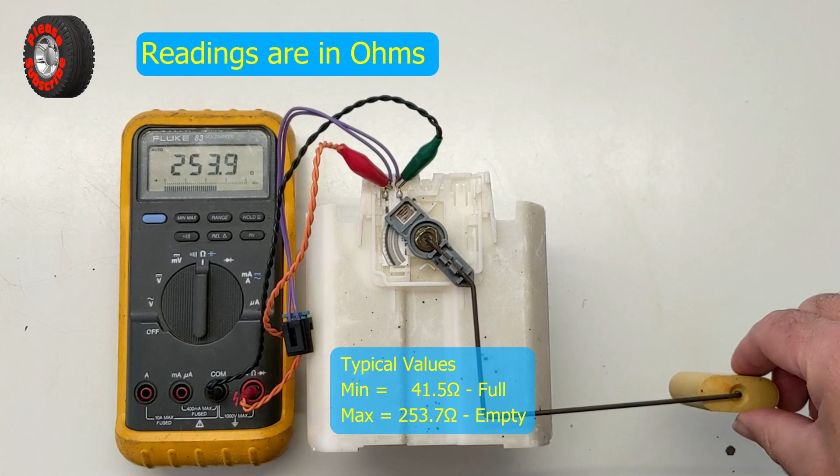Here is the real life operation of the float arm. This is an old float arm, so there are some dead spots. It's sat out in the atmosphere for a long time and it's got a bit corroded, but you can generally see the complete operation here from min to max. Interesting to note that at the low spot here,

there's actually a gap of about 5 or 6 millimeters between the base of the internal compartment and the float. So this sits directly on the fuel tank base inside under spring pressure, and then as the fuel level rises, your float level rises, and that comes to the absolute maximum.

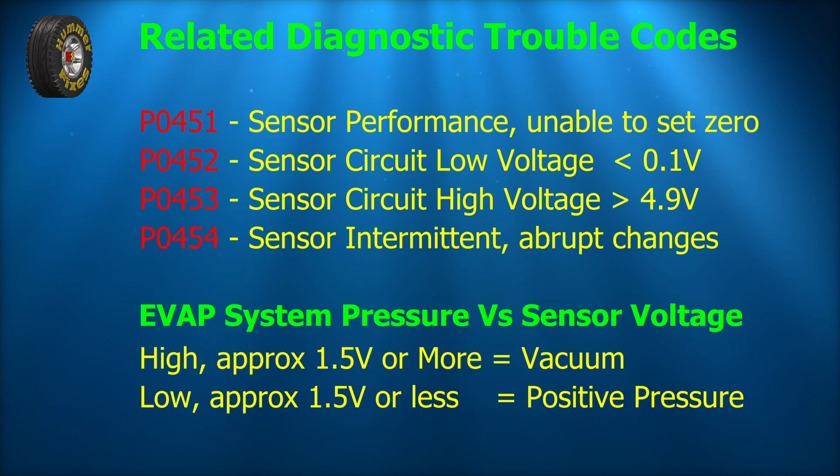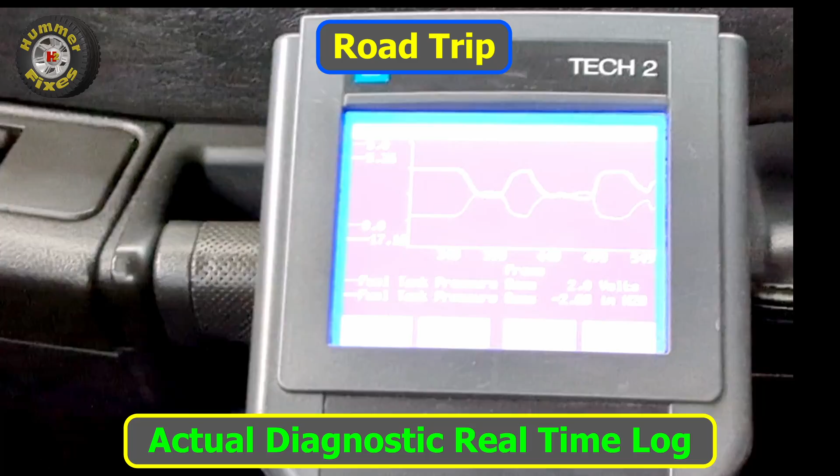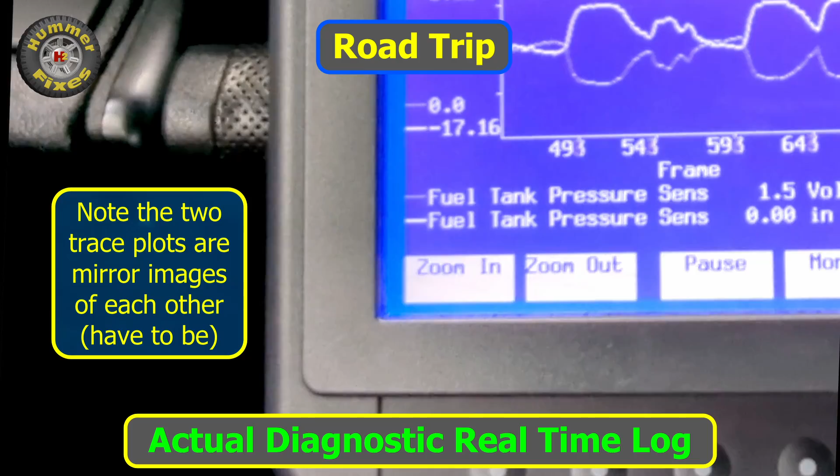Anyway, that's the result of the journey. The small dotted line, the thinner line, is the actual pressure sensor value, which is obviously changing, and the thicker line is the actual inches of water. So that should give us something to work with.

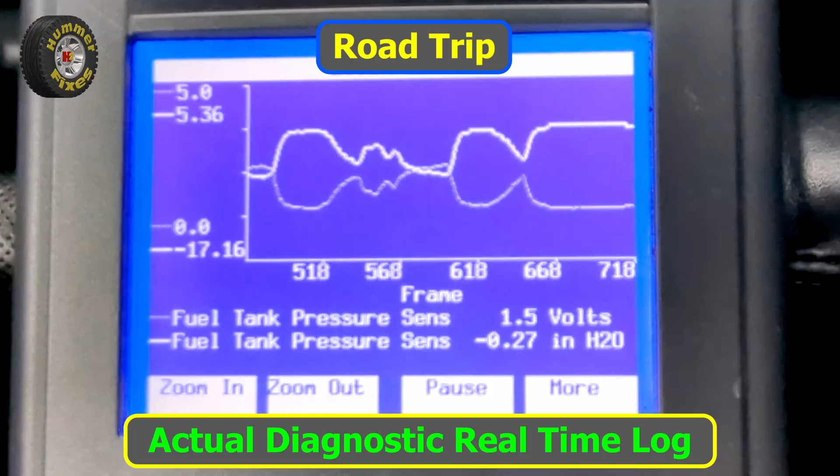Here is the vacuum sensor, or fuel tank pressure sensor, or vapor sensor, goes by several names. This particular sensor is used in a lot of vehicles. It's used in Hummers 2003 to 2007. I think 2008, 2009 may use a different sensor.

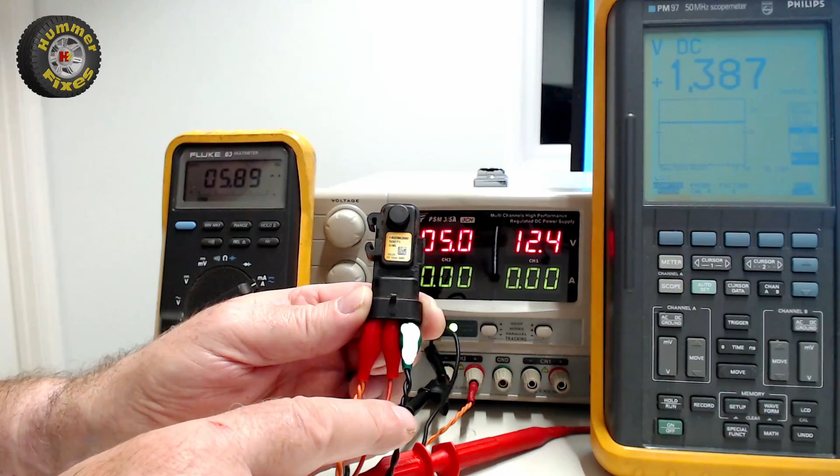To show how it operates, I've hooked it up to a power supply which is set for 5 volts, which is this value here. The scope on the right there is measuring the signal voltage. The meter on the left here is measuring the current going through the device. So on the left hand side, on the orange wire, we've got 5 volts. The middle wire, red wire, is the signal, and the black wire on the end there is 0 volts or ground or chassis. There's a port on the back there which connects via a rubber grommet, which I think when

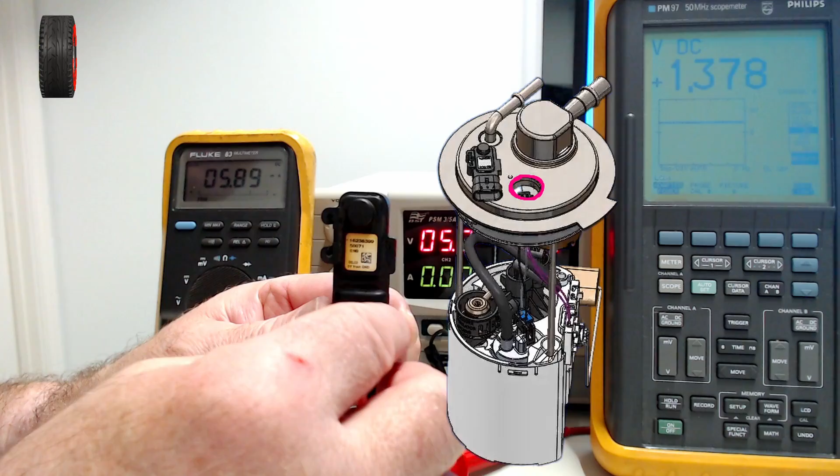you buy them they come as a pair. You get a grommet and this at the same time, and that just pushes in either into the tank or into the fuel pump. The reading on the right at the moment is measuring the ambient tank pressure. You will see that as the pressure goes down, then the voltage will go up, and when the pressure goes up, the voltage will go down. So it's kind of upside down really, it's the inverse.

To show it operating, which is very difficult to actually do in vehicle, I've got a miniature Hummer H2 fuel tank to simulate what goes on. So we just stick that pipe on the sensor, which is hard to do without actually changing anything. If I squeeze the tank, which is creating positive pressure, you'll see that the voltage goes down. I'm hardly pressing that at all.

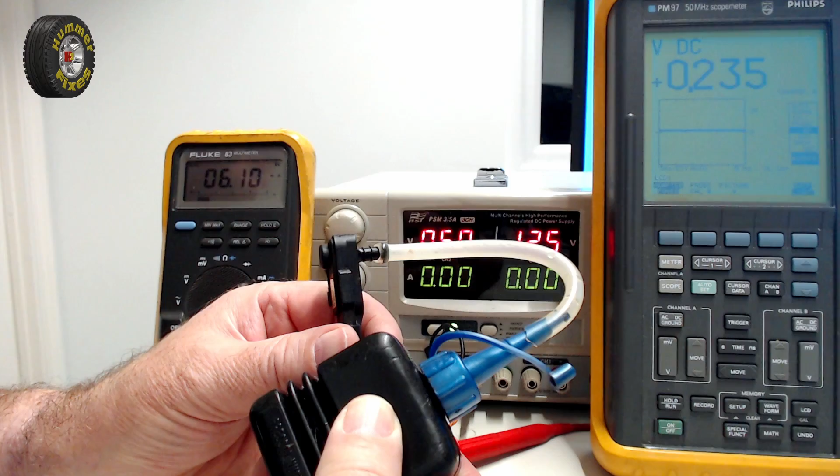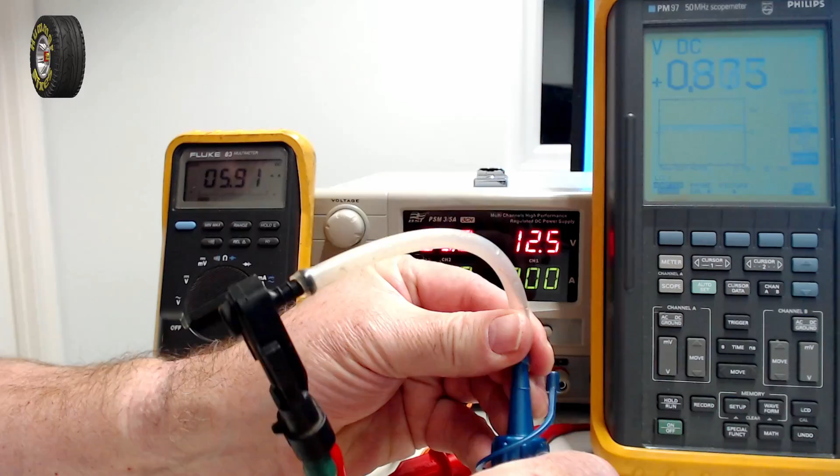These are very small readings, and I'm going to try and convert these on screen for you in pounds per square inch, which I think is what most people are used to dealing with, instead of inches of water. If I let it go again, it returns to whatever pressure was left in the system. If I unplug the tank, which is easiest done on this end, and then squeeze it to create a vacuum and let go, you can see that the voltage now goes pretty much up to maximum.

Above 4.9 is considered a fault and will be reported as a DTC code, and similarly below 0.1 is also considered a fault and you'll get a DTC. So that sets the opposite operating range. 1.5 volts is normal atmospheric pressure, I believe. This will be below 15 pounds per psi. That's what atmospheric will be.

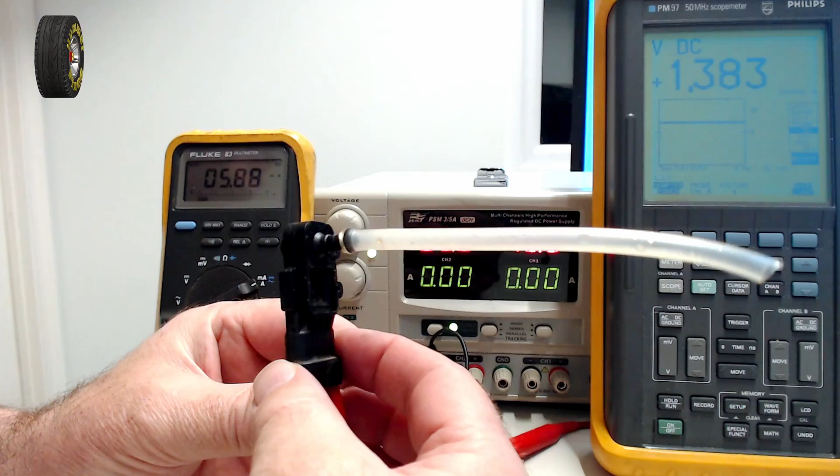So you can see the pressure is quite high here today, and we are, as you go up in altitude, the pressure will go down. So all of these things are affected by altitude and pressure. So that's how that sensor operates. Quite simple and very sensitive, I have to say.

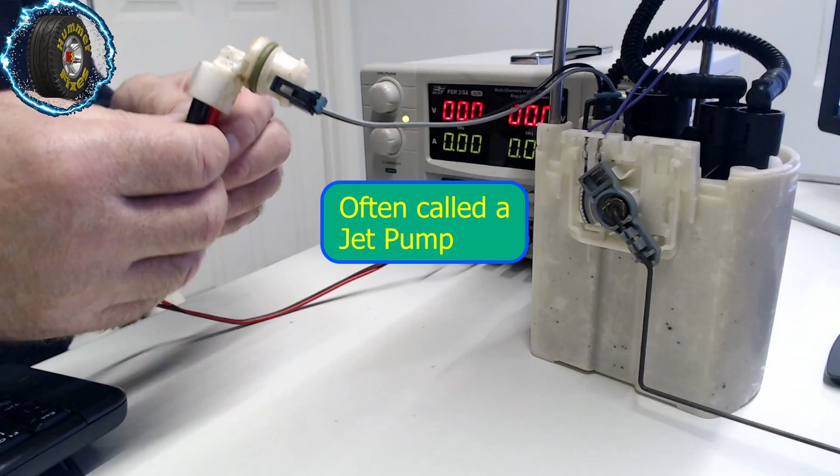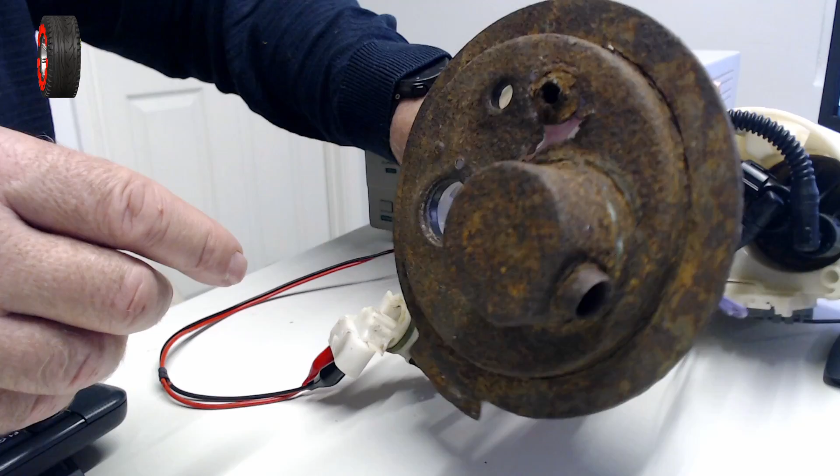Here I've hooked up the fuel pump motor to a bench power supply. These connectors just plug in. This connector was the one that actually sat in the top there, which I've removed. You can just see the hole that it mounted in here. That was the hole there. So I've taken that out. That is pushed in. It's pretty hard to pull out, particularly if your fuel pump is rusty like this one. I've connected it up. I've set the power supply to 12 volts.

I'm just going to turn it on and see what current it takes. I must point out there is no fluid in the reservoir on this, so this pump may not be straining too much. I have no idea what the actual current will go up to when it's pumping real fluid, it could well be double. As it stands with no fluid in the reservoir, we're taking about 1.2 amps.

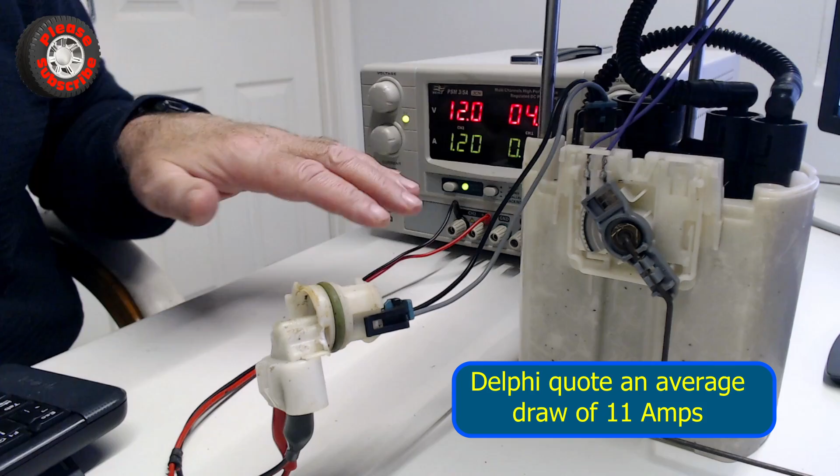This pump sounds a little bit ropey to me. Probably because it's been stood in the atmosphere for quite some time, well over 2 years, and it's probably dried out and the bearings are dry. Bearing in mind this pump actually operates submerged in fuel, so all these electrical connections and everything, including the float sensor, are all submerged in fuel.

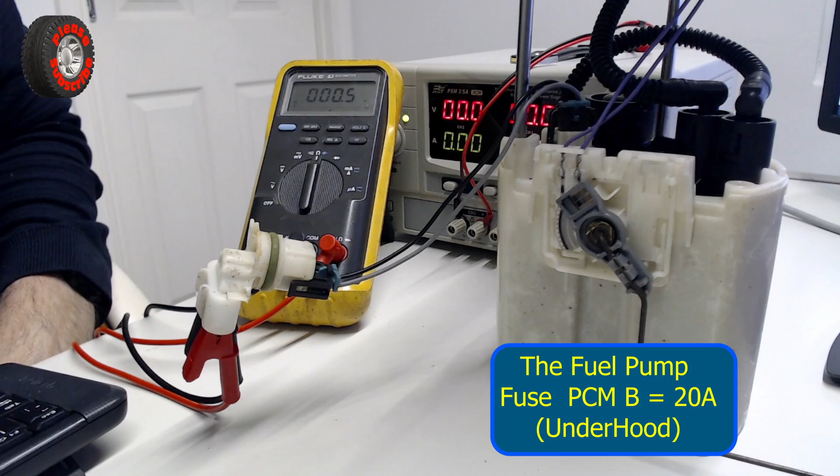One final thing on the fuel pump motor. I've got a multimeter here set on ohms. The probes have been zeroed out, so it should read 0 ohms, and we can now measure the resistance of the fuel pump. Bearing in mind this is not a proper test because once it starts up the dynamics change, but with no energy connected to the motor we're registering half an ohm, so it's very low impedance. You'd infer from that that at 12 volts that'd be like 24 amps, which would be a lot, but I don't think it's going to be that much. This is for reference, so if you wanted to measure your fuel pump to check for correct wiring or no breaks in the wiring, you should be seeing quite a low resistance like this without any power connected. That's with the leads going into the terminal on the top of the pump.

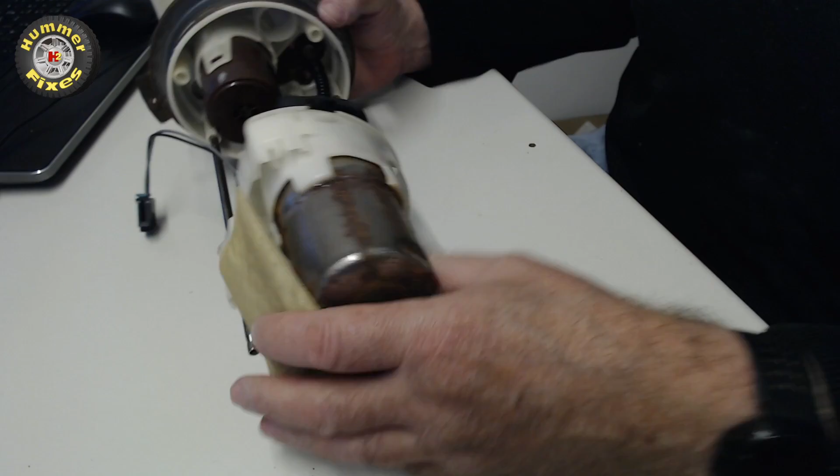Whilst I have the pump apart, you can see here is the sock filter, which looks a little bit like my CAD model, and you can see that clips in over the motor and locks it into place.

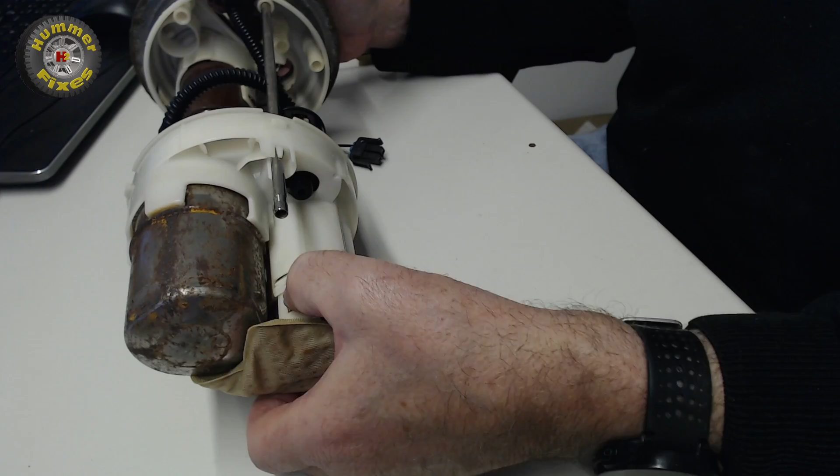I'm going to see if I can just unclip this. Might be able to do it, I don't know. This pipe's attached to the top, but we'll see if we can get it to come out.

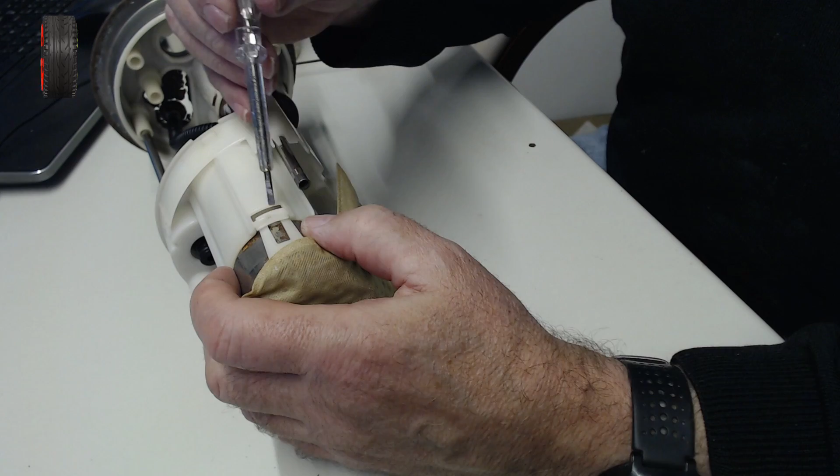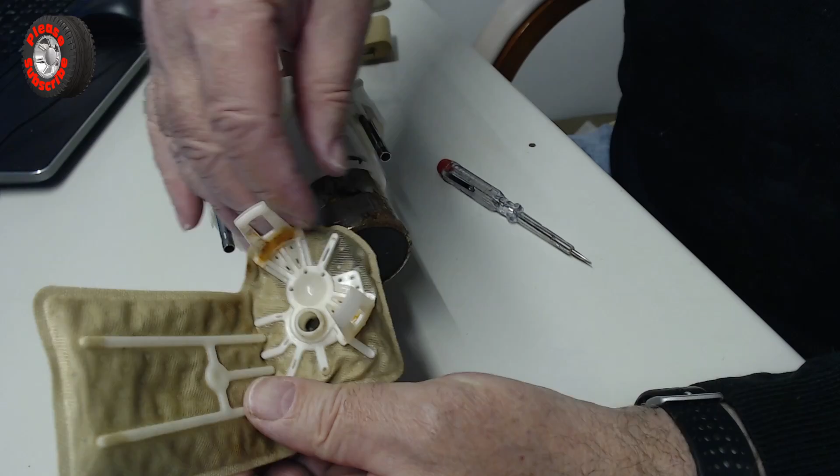That's one half, and there's the other half, so that's the sock filter. You can see, as I mentioned before, this is probably well rusty because it's been stood out in the atmosphere, and normally this is submerged or well soaked in fuel. What the state is internally on this, I'm not sure, maybe one day I'll cut it open and have a look.

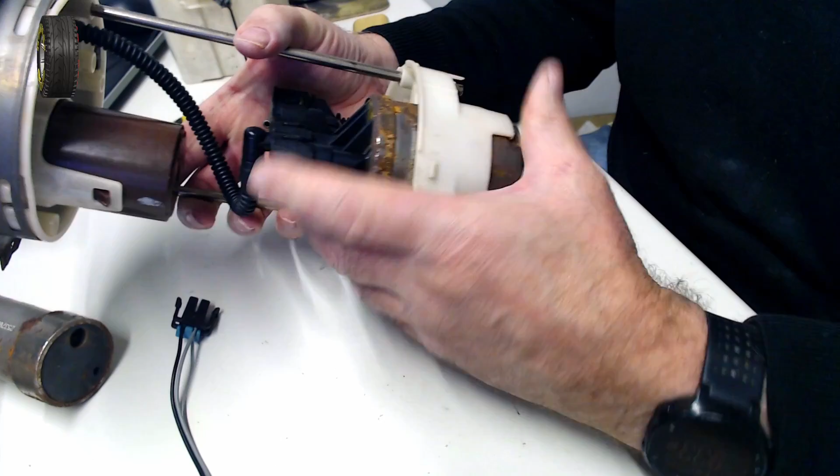Alright, I've managed to get the filter past these 4 clips. It took several screwdrivers and some thin steel rules to actually get it past, but it just came out. Again, this is not a service replaceable item, and you can see it's probably not cost effective.

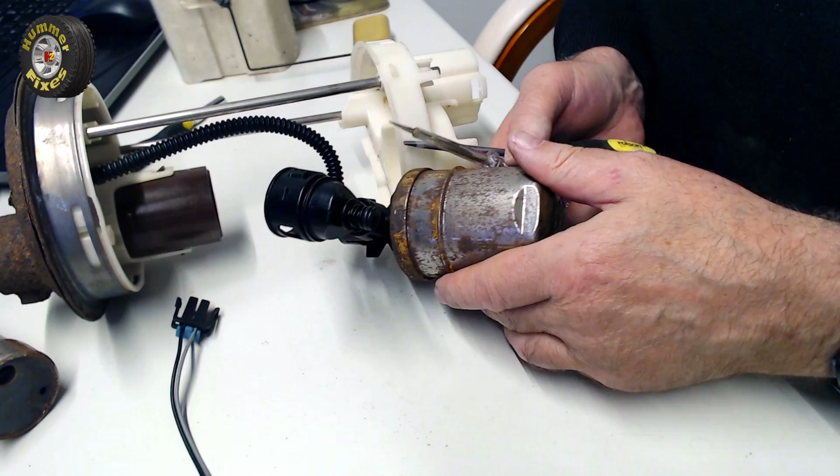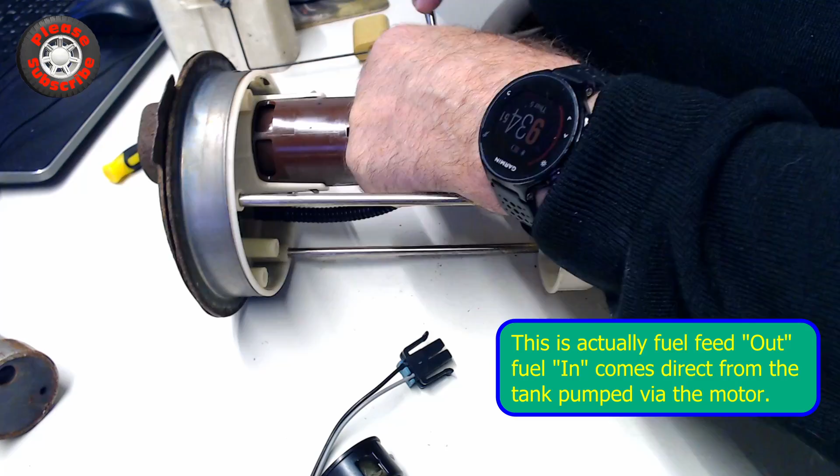On the end of the fuel filter is the pressure regulator, which I can release, so that's the pressure regulator assembly. That itself is a clip-in item, I'll talk about that in a minute. There's the fuel feed out, which is this line here, it's tricky. So there we have the fuel feed, which is bonded to the pipe that's in the top there.

And there is the fuel filter, which looks exactly like the CAD model, and you can see internally in here are the O-rings for the seals. There's one in every port, so there are 3 altogether, 3 O-rings which seal. Again, there's something loose inside there, it could be interesting, maybe I will cut this open and have a look at the end when we're done.

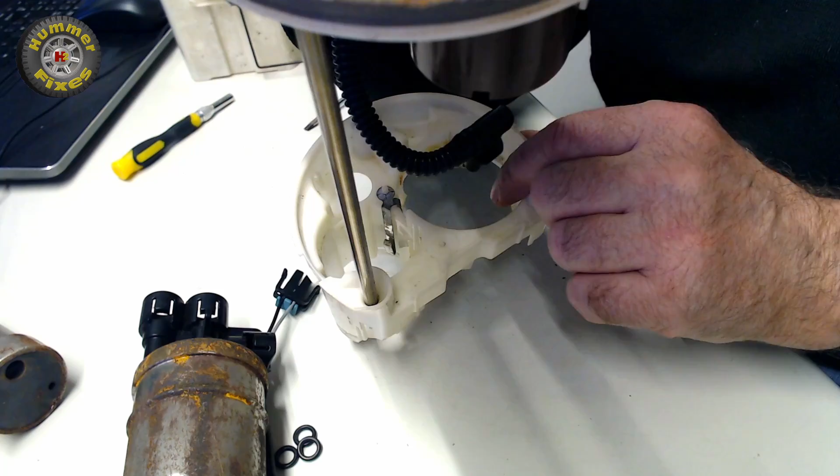One interesting thing in the actual internal frame is there's a metal tag, can you see that there? What that does is it grounds the motor and the filter together. I suspect it's to stop the risk of any kind of spark between the two.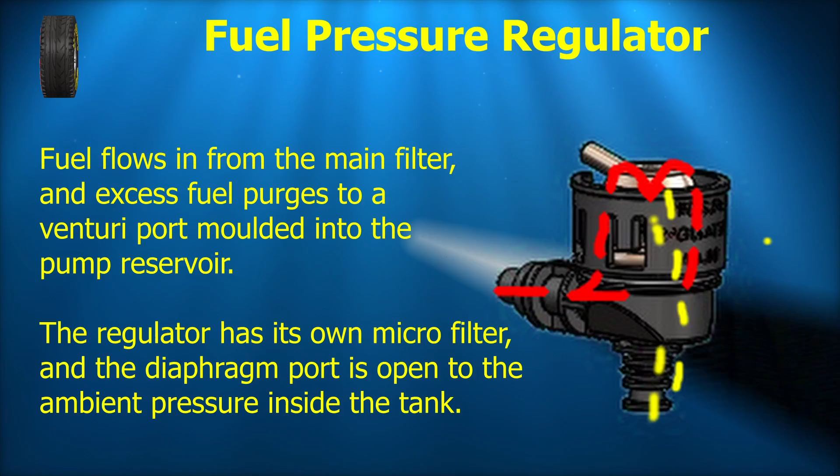So now we come on to the pressure regulator, which I'll try and get out. Alright, I've managed to release the regulator. Now I have to confess I don't understand what the internal arrangement actually looks like, I've only got my interpretation of what it is. I seem to be missing something.

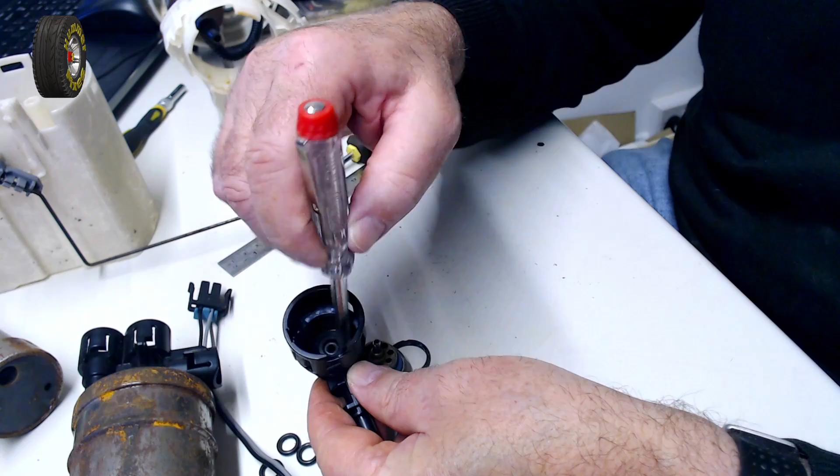Oh yes, there's an O-ring, a large blue O-ring which is inside, which sits over there like that to form a seal. And then inside this housing is a mesh filter. What happens is fuel comes in from the filter through this port here, circles around inside there, so it goes around this kind of cavity here, and it's forced through this mesh filter into the pressure regulator.

Inside the pressure regulator is a pipe which presses against the diaphragm. You can feel the diaphragm inside, and the spring tension of that diaphragm is controlled by this screw. There's a spring inside, and as soon as the required pressure is reached, fuel starts to come out down the center of this tube, feeds into the cavity, goes around inside, and comes back up through these holes and ports. So that's how that pressure regulator works.

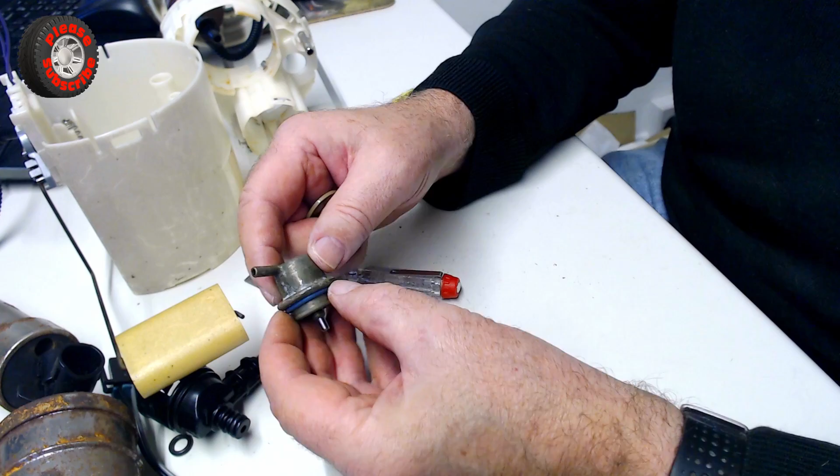This is very similar in shape and size to the one on the 2003, which is external. I would imagine they're going to be similar pressures.

This is a closer look at the fuel pump reservoir. You can see there is a spring in here. The difference between this AC Delco unit and the others is that this spring is internal and not wrapped around the shaft of the actual fuel pump stands.

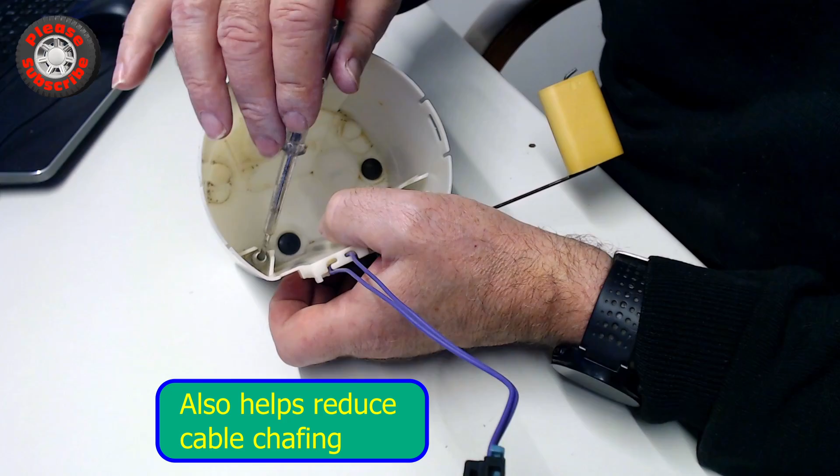The point is that this stops any chance of cables getting trapped during the lifetime of the pump, so it's held internally. What that spring does is ensure that the base of the reservoir is always in contact with the bottom of the tank. The tank can expand slightly and the fuel sloshes around, so it's important that this is datumed against the bottom of the tank at all times. That's what that spring does.

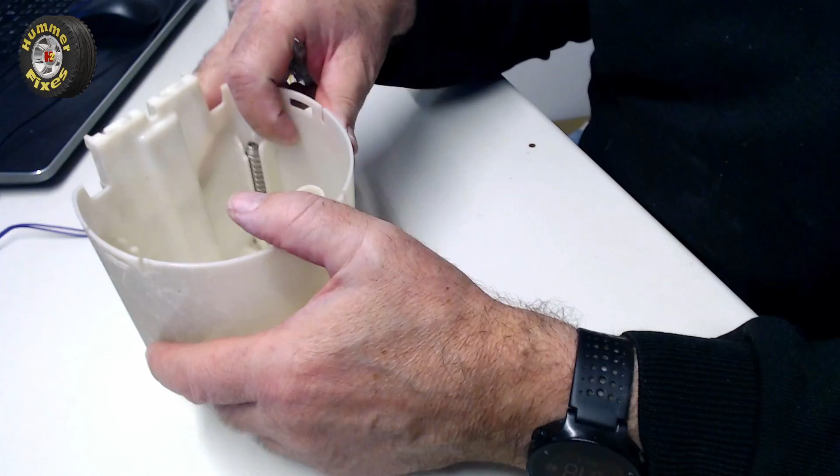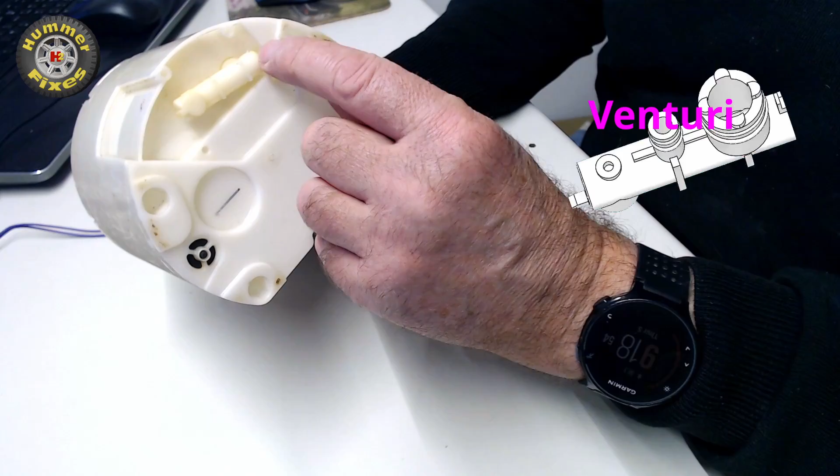Also the reservoir has this venturi. The venturi is fed down this pipe from the pressure regulator, so you've got fuel going down this tube under pressure, and it goes straight through this little venturi. It's very difficult to see - I can probably do a CAD model of this - but there's a gap between the nozzle of this little pipe and the reservoir.

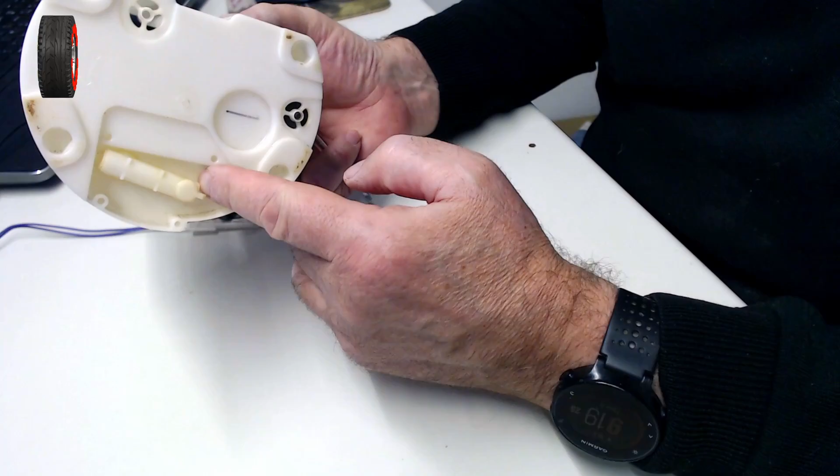What that does is as the fuel is fed back in under pressure - fuel that's not being fed to the fuel line is returned back into the pump and sprayed back up this tube - as it does so, under the venturi effect, it pulls more fuel in, so fuel is coming in through here and back into the reservoir.

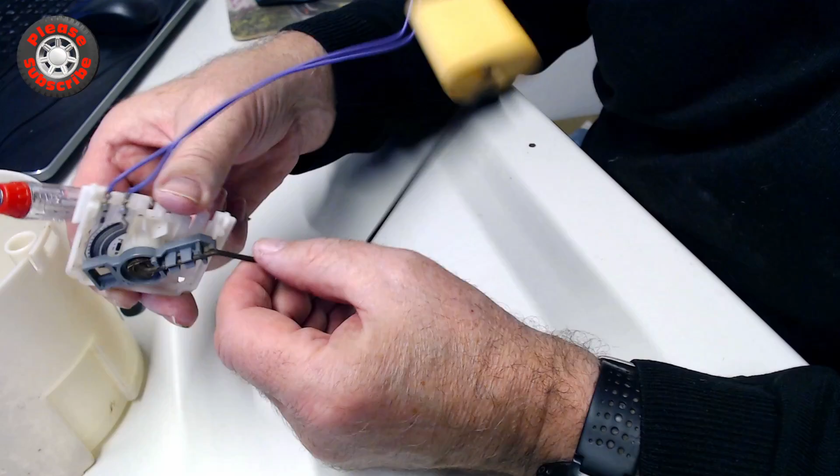Then we've got the sender, which we looked at earlier - I didn't point out in that video that this is a ceramic thick film resistor with little wipers on it. Different fuel pump manufacturers make different claims about the quality of these wipers, whether they've got 1, 2, 3, and what they're made of. That's quite important because this is constantly going up and down with the fuel throughout the life of the fuel pump.

You can see it's soldered onto these wires, and this cable just plugs into the top of the pump. This just slides in - it slides in quite easily. These cables get hooked around here, and it just literally clips in.

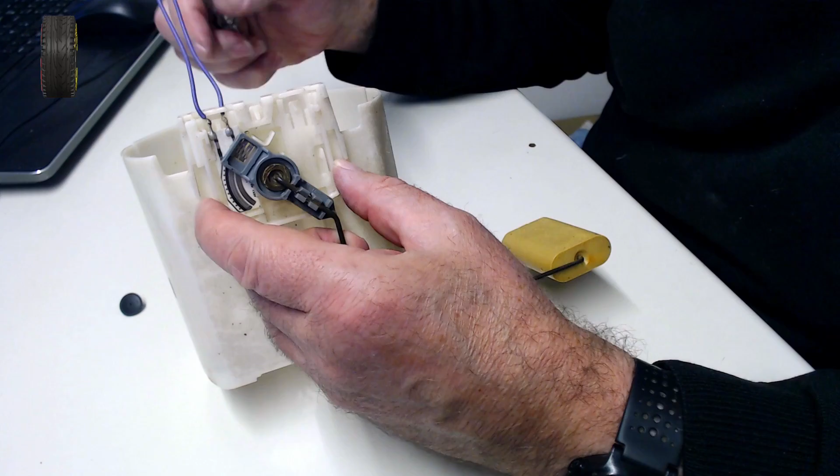Getting it out, however, is a lot more tricky, as I'm sure you'd like it to be, because you don't want this jumping out when you're driving around. So we'll release the clip this side, keep holding it, pressing it down, and release the clip on the back, and then it pops out. I'm sure you'll figure it out, it's not difficult.

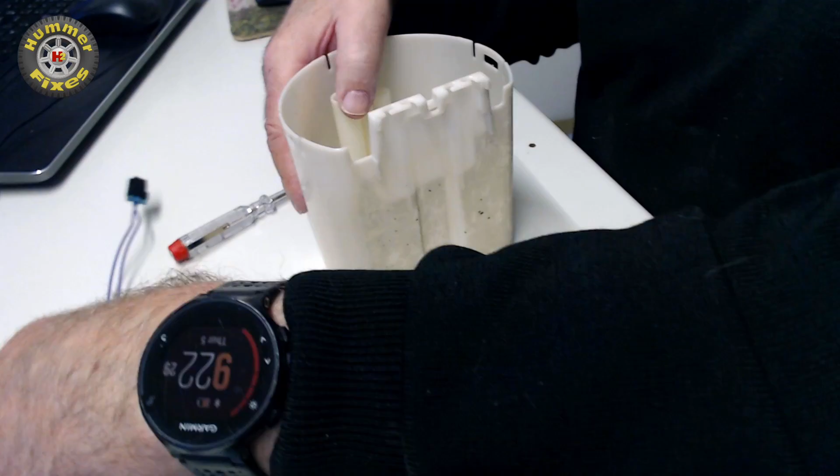But that's the fuel pump reservoir in essence: two one-way valves, a venturi at the bottom for the return fuel, and the sender there, which we've discussed in detail earlier on.

So what we're left with is the backflow restriction device that's fitted into the lid here. This little backflow regulator stops the fuel from flowing back through the EVAP line.

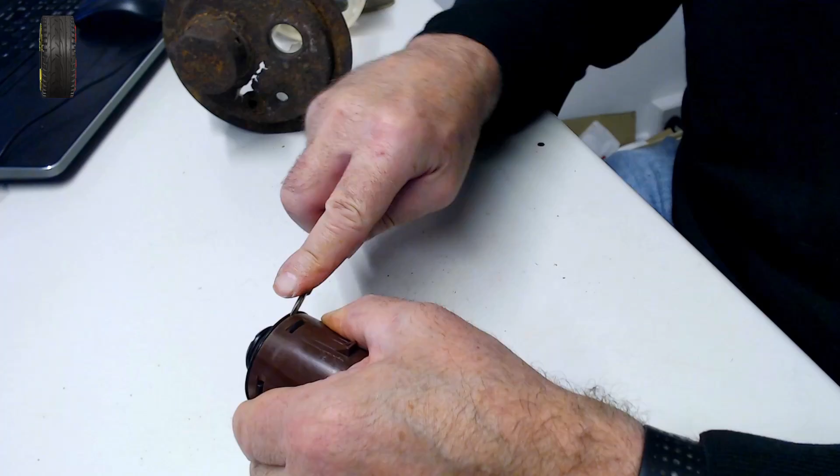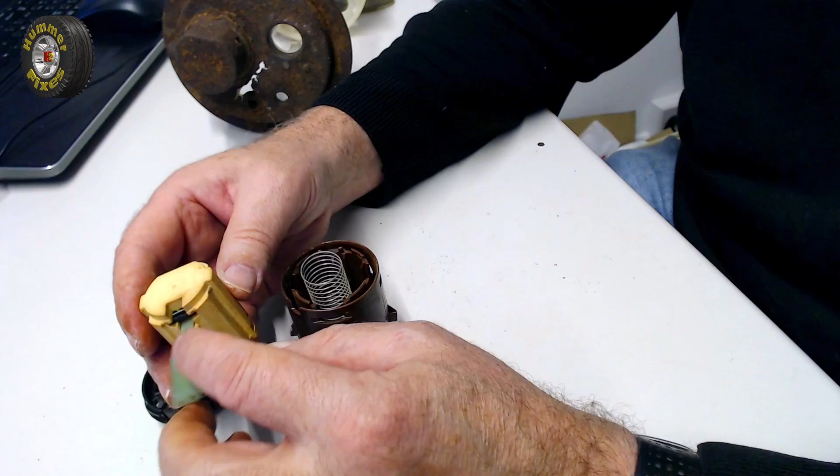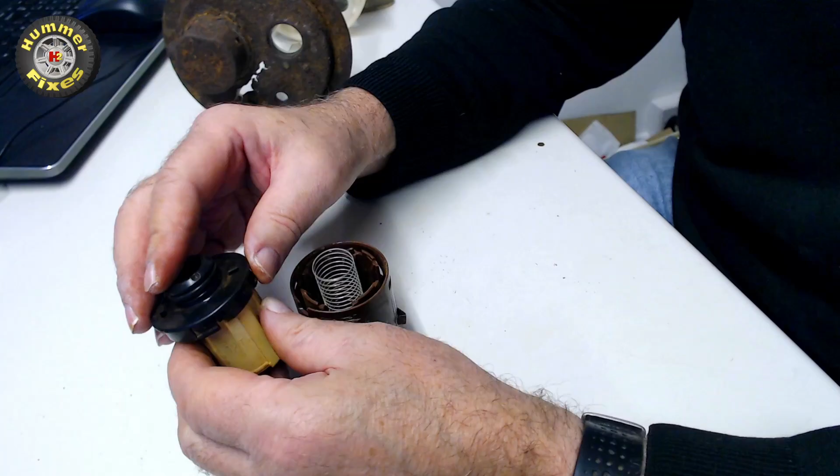On top of here is a float chamber, and you can see there's a spring inside. The float is probably designed similar to the sender arm, and you can see it's got this little nitrile seal that goes on top. The idea is it pushes against there, and as the fuel floats up, it hits that stop. You've got a counterbalancing spring here just to make it exactly the right pressure, just enough to close that valve off.

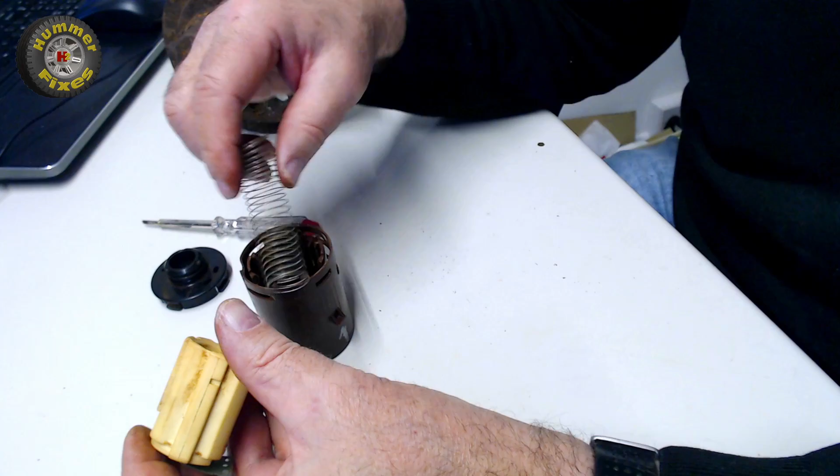So that spring goes in there, rides up and down as it fills up with fluid, which comes in through the base and then blocks the port off. This has got an O-ring on it which sits inside here, and it's kind of like a dogleg shape that comes out finally through the EVAP line.

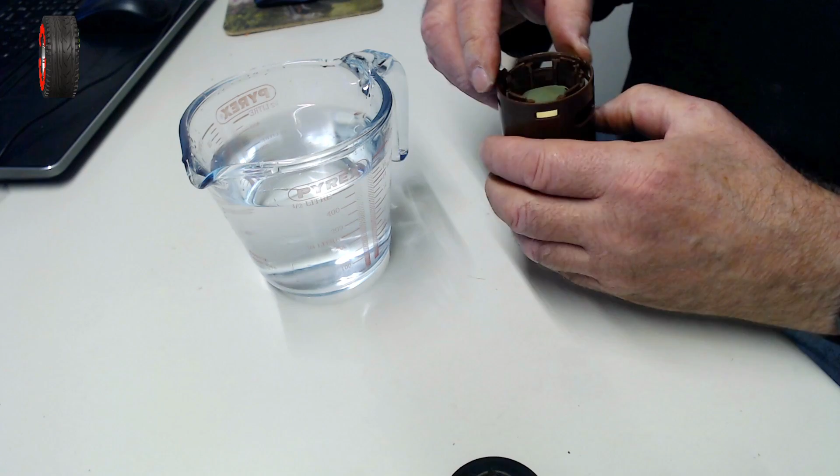Test the little backflow valve. I'm just going to try dropping it in as the fuel level rises. You can see it pushes up and stops the valve, which is exactly what it's designed to do. How clever is that?

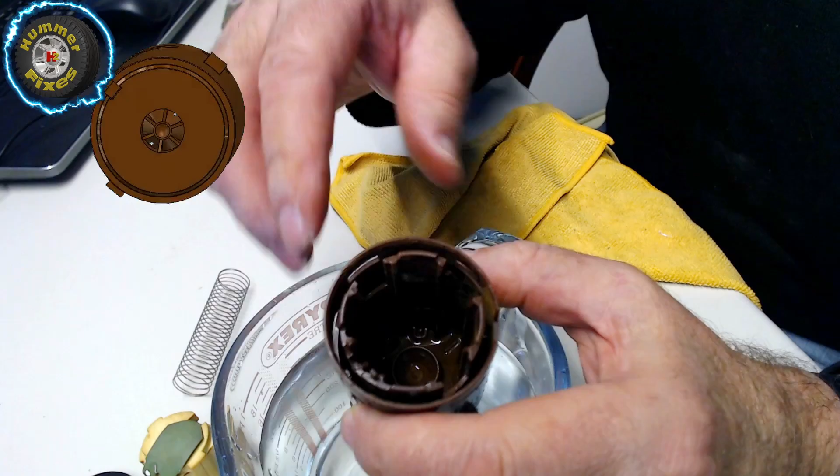Just to add to this, you can see at the bottom there are two holes. The rate of flow of water, or fuel in this case, is controlled by those holes. So it takes a while for it to fill up, and it takes a while for it to go down.

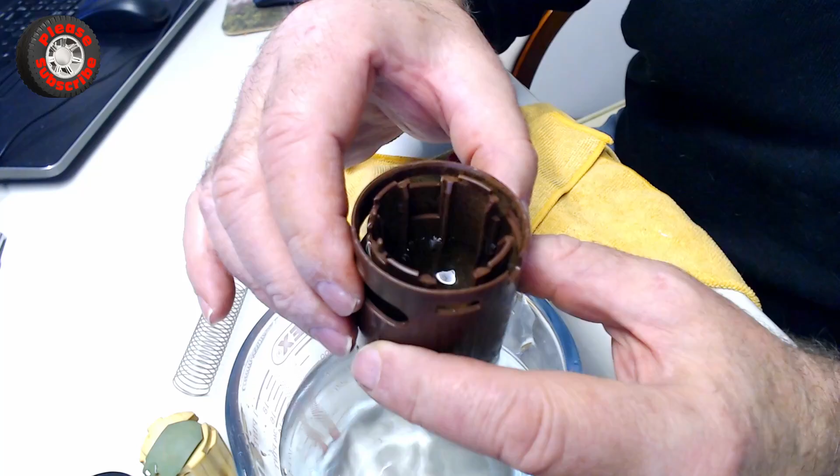That's some kind of damping. I think this being held in is probably by meniscus, fuel is probably a bit easier to flow than water, but that's what that's for. So everything's designed for a reason. Very clever. Some of these things from GM are extremely clever.

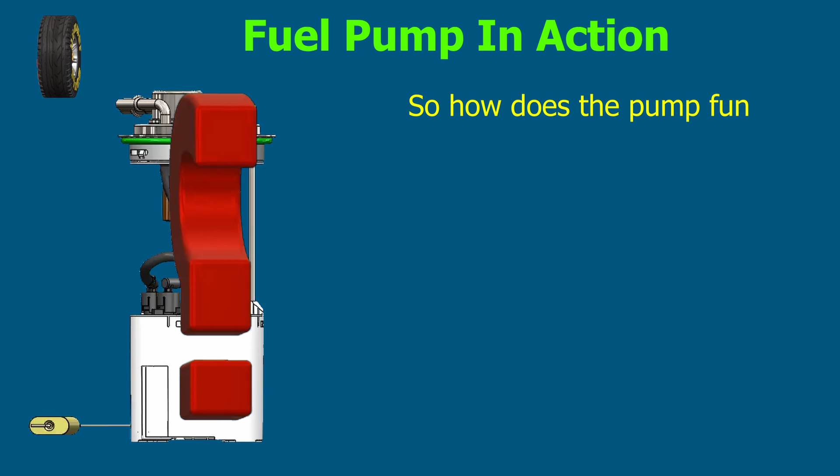When making this video, I was always keen to see what happened to a fuel pump in real life. It's very difficult, obviously, when something's self-contained in a fuel tank, to see what actually happens. So to try and see this, I've got my old fuel pump connected to a bench power supply, with the 12 volt positive lead going to the grey wire on the pump, which is reversed to my earlier video, but I wasn't pumping anything, so it really didn't matter.

I've got a bowl full of plain water. The fuel line has been doubled back into the bowl. I've got a meter here set to millivolts. There's a 10 amp shunt in here, so it's 100 millivolts for the full 10 amp range. I did try using the meter on its 10 amp range and it blew the fuse, which is hardly surprising. It's quite a surge that takes place when this thing kicks off.

So we can see the current being drawn on here. I'll turn it on and we'll get the pump recycling. That flow seems normal compared to the other videos that I've been watching on YouTube. That seems a perfectly reasonable amount of fuel rate. Not to confuse fuel flow with fuel pressure, two different things.

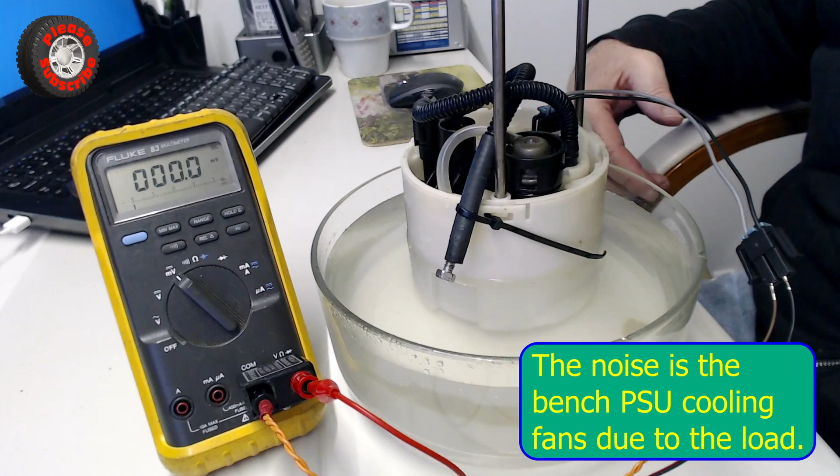To simulate having pressure, I've got a screw which I'm going to screw into the end of that pipe, and we'll see what happens. So water can escape around the threads, and this would simulate probably a car not running with the fuel pump on. So let's just see what happens.

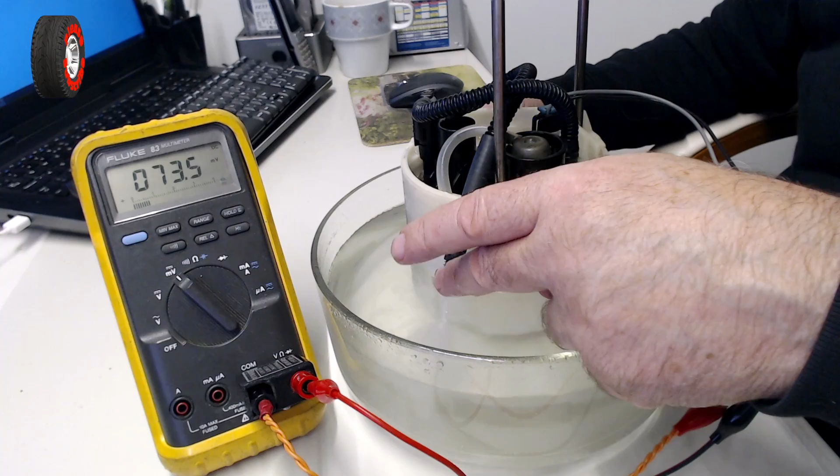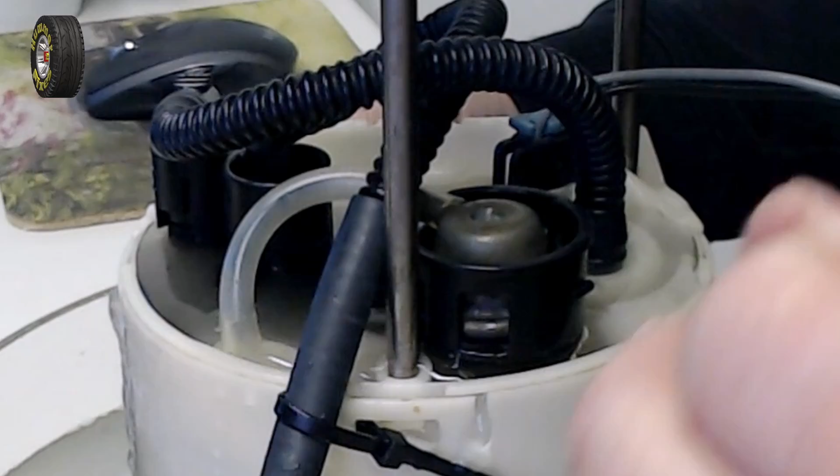And you can see some fuel is coming out through the threads, but you can see the reservoir is now filled up full of fluid, and you could hear the actual pressure regulator kick in. But now just look what's happened to the current. The current has now gone up to 7.35 amps, and that value is probably more in keeping with what happens in real life. At the moment this is kind of like in a reflow mode. This is if your engine isn't running and the fuel has just been totally recycled.

Now I think we could change that flow rate by adjusting the pressure regulator on here. It doesn't matter, it's never going to be used again. So if I increase the amount of pressure required to cause the flow, you can see that the current's going up.

So that's the effect of the pressure regulator. If we went the other way, you'd watch it go down. So that's quite a spectacular operation of your fuel pump. You can see that the venturi is feeding fluid back into the reservoir, filling it up, and it's just nicely recycling.

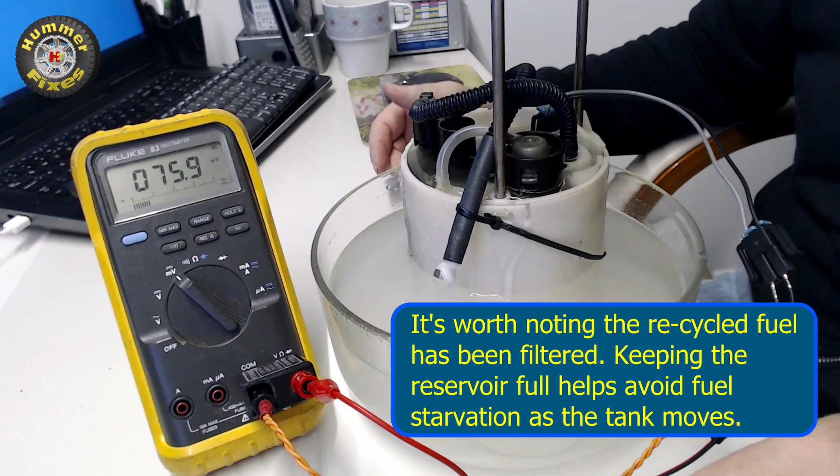I'm not going to try unscrewing the screw out while it's running because the pressure surge is amazing. I've got water all over my office space here. It's quite explosive, not to be underestimated. So that is the fuel pump actually running as in real life.

I just slackened the screw off and just increased the flow a little bit more there, and I just wanted to see what the actual current was happening. So that's another part to the story on fuel pumps. Quite exciting, I think. Probably worth a whole video just to see this happening.